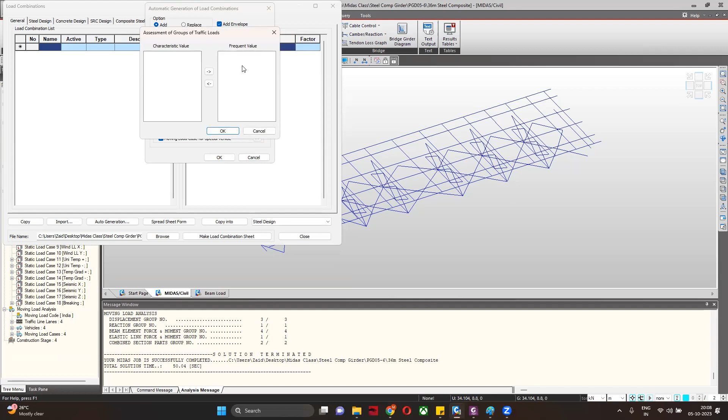Road traffic, not showing anything. Traffic load, I already considered it. Road traffic will be if any other loads you want to consider. Now, if you click OK, it will quickly generate everything. Now, if you look at this one, it has been mentioned here also, and here it has been mentioned, this is a description they are giving.

1.5, 1.35. This is characteristic, like stress, frequent, quasi-permanent, and above that are all our strength ones. This TR1 addition.

So now, when you look, if you want to do the steel design and composite design, nothing has been shown here. So what we need to do, we need to select all the load combinations, and we need to copy them into steel design and also into composite design. Now, if you go into steel design, it will show all the load combinations which we have created. And if you go into the composite design, it will also show all the load combinations. So that's how we need to consider those things.

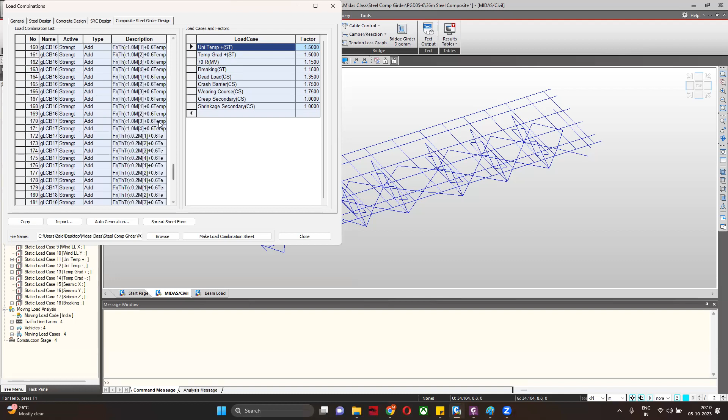So we can easily see what happens in this: it considers combinations as per our static load cases. If you go into the load, we have done it in static load, there are these static load cases. So it considers combinations by the type of load we have provided. We have provided wind, temperature, temperature gradient, or any earthquake or braking. So it automatically distributes. Midas already knows. This is smart. Midas knows according to the type which is required.

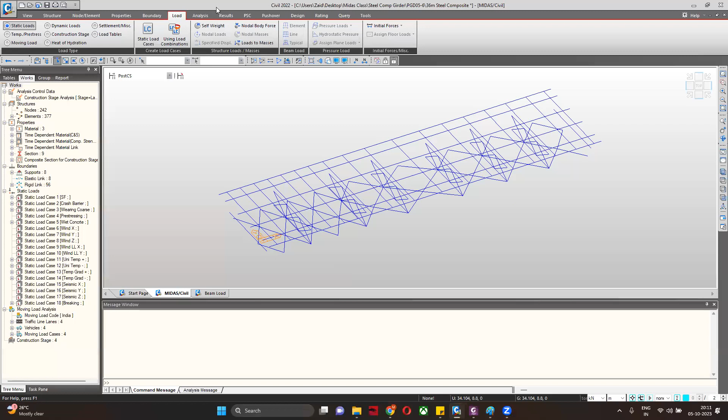Now another thing is that we know that we do not need to design bracing in steel composite, and we do not need to design steel composite with the steel girder. So both things are different. First of all, you need to understand that everything will behave differently. So that's how we consider it for the design part.

Design is pretty much, if you go into the design, we are not going into PSC. Previously, I have shown this kind of thing, PSC. Here we do not go because this is totally applicable for PSC girders, not for any other. So if you go into design, first of all steel design is here, then RC design, SRC, composite design, and here are the common parameters. First we need to do the steel design. Click on the steel design, and we need to select our code.

Now, if you look at the code, generally all codes are available. AASHTO 17, AISC, then Eurocode, BS 5950, IS 800 LSD, limit state design, and IS 800 1984 ASD, allowable stress design. Then IRC 24 2010, this is again LSD. Then this is CSA, the Canadian code.

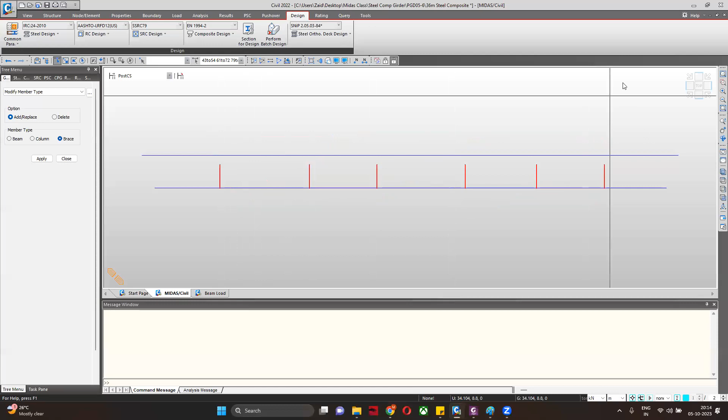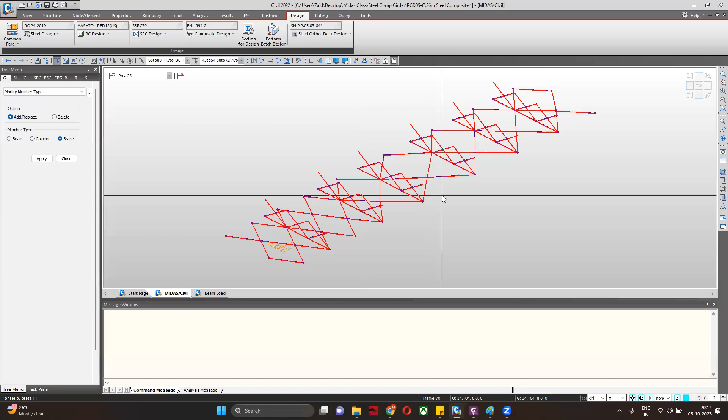Now here, if you look, we need to define which is bracing, which is beam, which is column. So here, this is our bracing, the X1. This, and even the bottom X. So let me first select this. That's how we are able to differentiate. Bottom one is already. Now you will select the bottom one also. But bottom one, you do not need to select this one. This will come into beam.

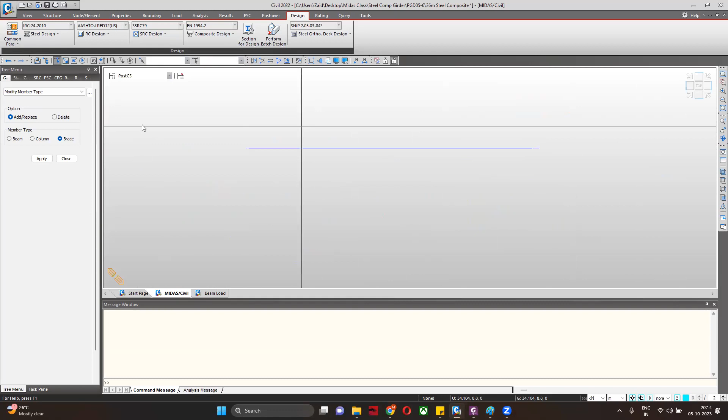Just deselect. And now, okay, this, select. I need to be careful when selecting. Or what I can do, I can select like this, and click on this thing. So this is going to be deselected. So these are all bracing. Click like this, not all the things are required, and click apply.

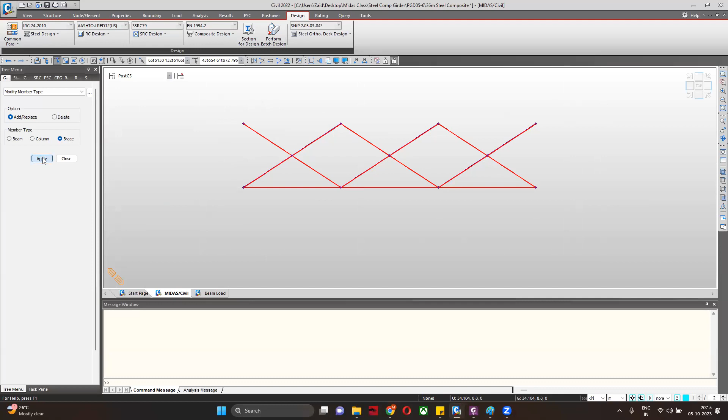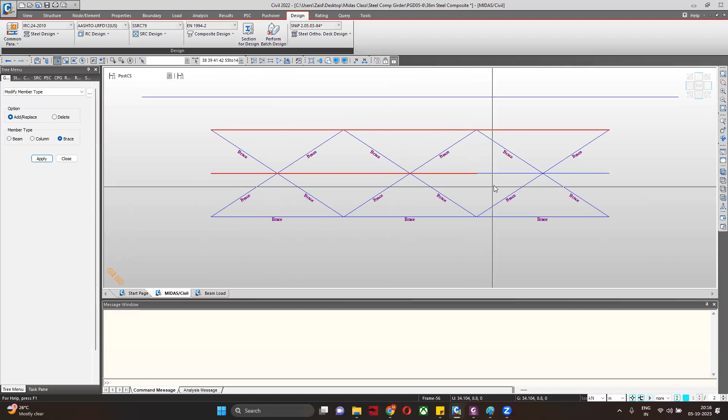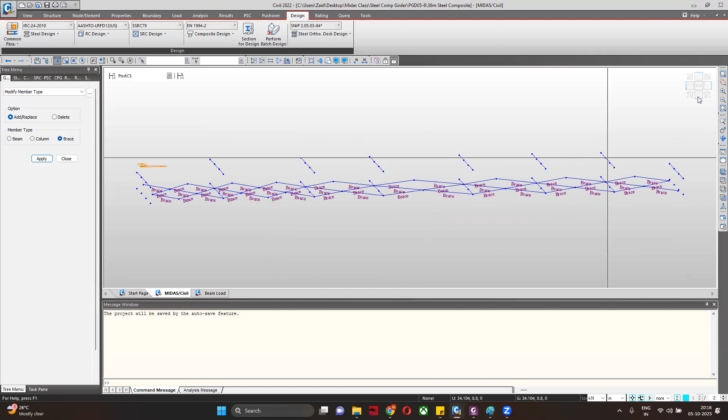Now it will consider this as a brace, and we will select our end diaphragm, our top bracing, not this one. Now we need to select the bottom one also, but for the bottom one we need to do a little bit. That means for this one, this one will come, this one, this one. This and this will come into your beam. Click apply. So this will become beam.

So there are two important things. Reverse member, local direction are not required, unbraced length right now not required, limiting slenderness ratio, not required. These are all not required. Now, if you have this common parameter, define it. So first of all, design code we have already considered.

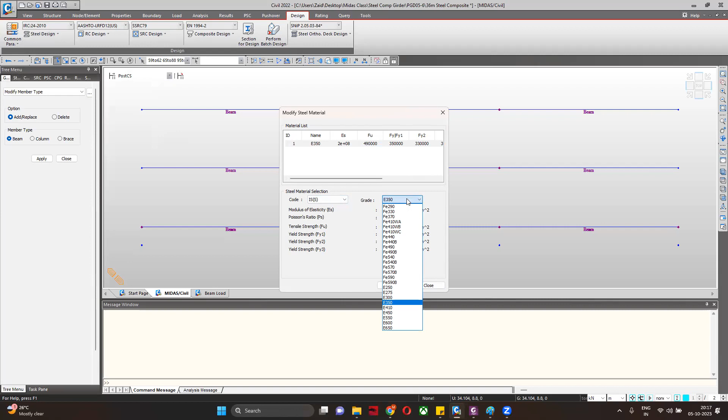Now steel material. If you look here, it will ask which material you are going to provide. We have already considered E350, for which our yield strength will be 350. But generally for bracing, sometimes low strength steel is used, so you can update to 250 for bracing. But right now I'm checking for this, so this is fine. Bending option not required, steel design table not required. Now you can click on steel design code, and it will run one command.

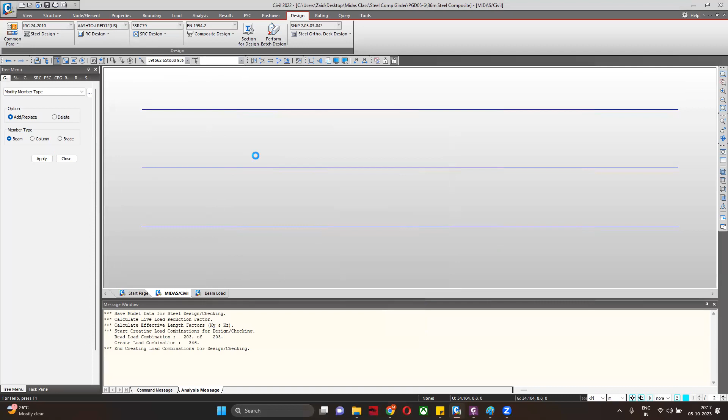So these beams are our girders, sir? No. Beams are your bracing which is connected transversely. Remember, we have not selected any girder members for assigning. Girder will be designed as composite. Yes. Now we are only considering the steel part first. Okay. Now we are designing the connected beams and the bracings. Yes, only end diaphragm and bracing. Will those also be E350 grade, sir? I have considered the same grade for all. It depends. You can consider a higher grade right now, but someone may ask that it be in a lower grade.

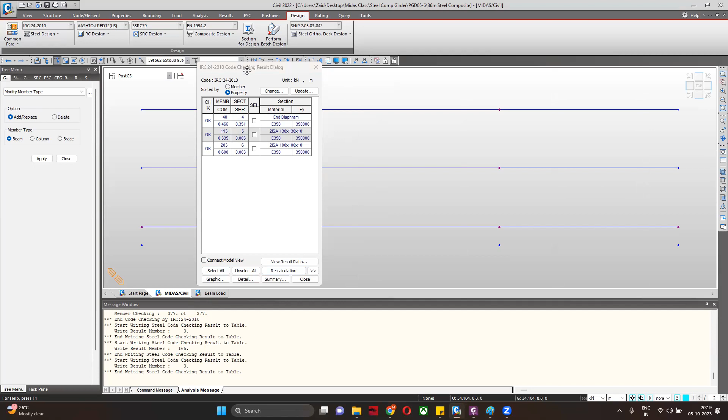Now, if you look here, it will give you this. It is checking right now as per properties. If I click as per member, we will have a lot of things. Now you can see the ratio it is giving: 0.4, 0.35, 0.35, 0.6, all are okay. And if I click on this, there is one more thing. What ratio is it giving, sir? I will show you. Wait a moment. First, what are all the parameters we need to check in steel design? Tell that, sir. Wait, I will show again.

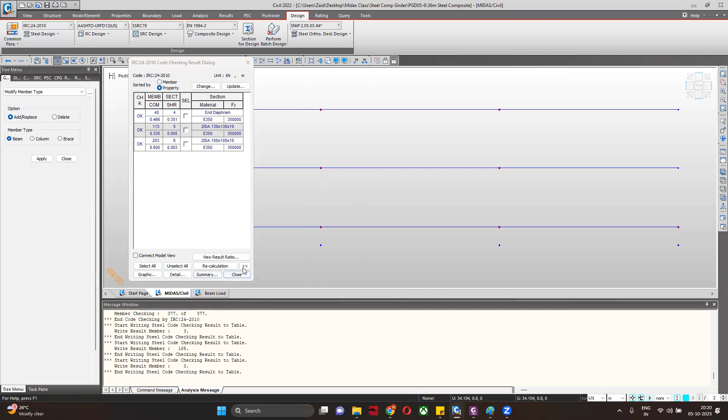Concrete, we know all the things: stress check, crack width. In steel it's different. In steel, the main ratio is the capacity as per the demand. You do not have a stress check. In steel, there is only axial force plus bending moment check. Or shear, sir? Shear is for the web, but generally shear does not govern much for bracing. Axial force governs. If you look here, N is my axial force, My is the moment in y direction, the major axis, and Mz is the moment in my minor axis.

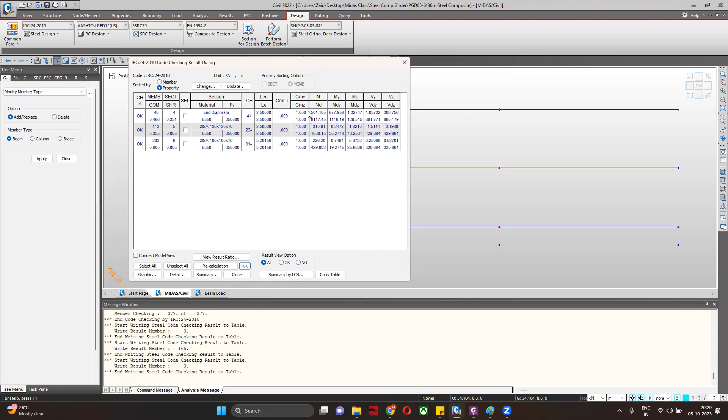Vy is your shear force in the minor axis, then Vz is the shear force in the major axis. So if you look here, these forces are given, and I want to show you the detail. I need to select a member like this one. There is one more thing, the table I am looking at. It shows graphic detail also, like this. So I have selected this right now.

So it is showing first of all the KL/r ratio. KL/r ratio is your slenderness ratio. So first it is checking that KL/r should be less than 180. It is less than 180, 90 is coming. Then another check for axial strength, then bending in both directions, then the combined check. The combined check is the most important, which is showing a ratio of 0.466.

Then afterward, it is checking the shear force. Shear force will be very minimal. Governing in steel is always the same: in bracing and all, it will be your axial force and bending. So if you look here, this is just the normal check. It does not have any detailed criteria.

Sir, slenderness should always be less than 180? Isn't there a difference for short and long columns? That is different. Column is different. Short column, long column limit is your 12. It should be less than 12. Slender is different. Slender relates to your web thickness and flange thicknesses.

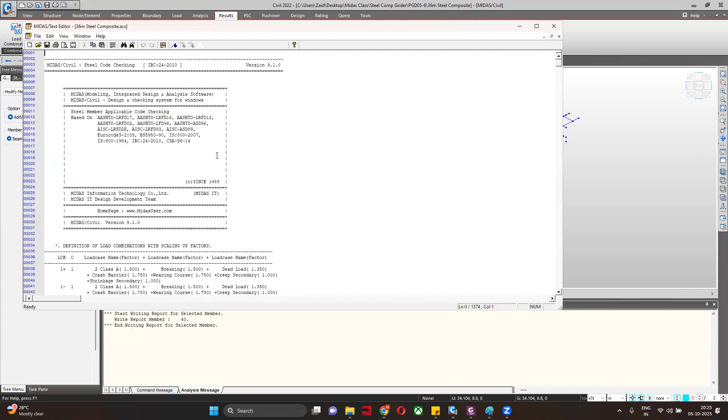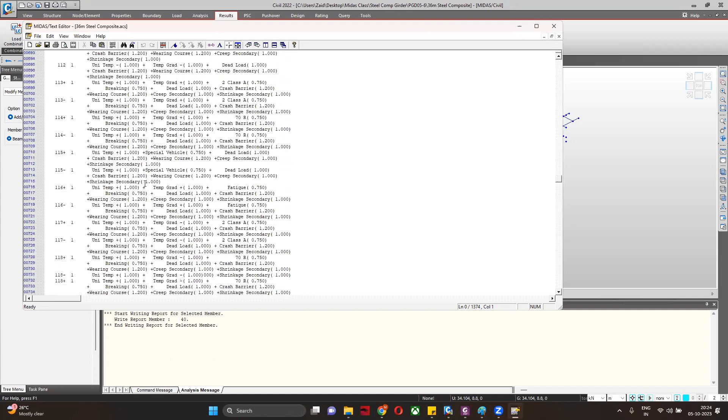Here, there is no bifurcation about plastic, compact, semi-compact. How will that be defined, sir? Let me check it. Now these are the forces that have been considered. This classification is only required for your beta factor, yes. But let me see whether it is considering those things or not. By forces, it is mentioning how much is coming.

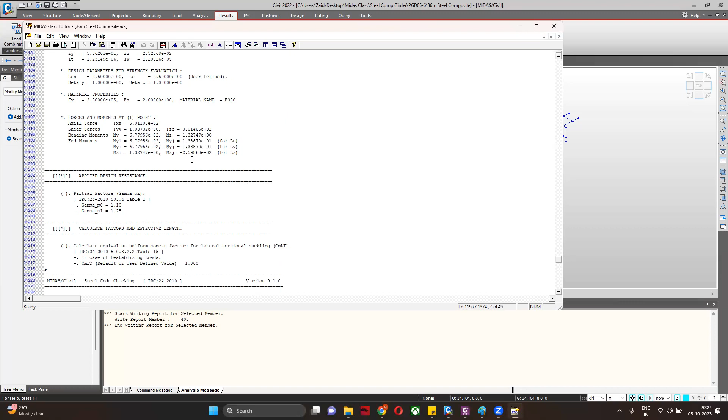You can see here the classification of my section. It is classified as semi-compact. That table is simply given in the code. I think I have shown you that. Let me open the code also. It's very simple. So it is checking the classification with the root of 250 upon fy. That's how we check it.

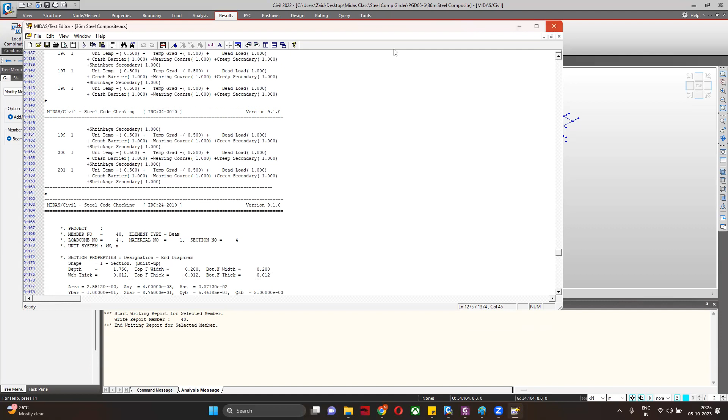Now go from the top, sir. This is the detailed design that MIDAS has given. From the top, the axial strength. At the top is the loading, nothing else. All these load combinations it will give you. Wait a moment, I will show you one more. There is one detail; you can get the detail according to this. Then there is a summary also.

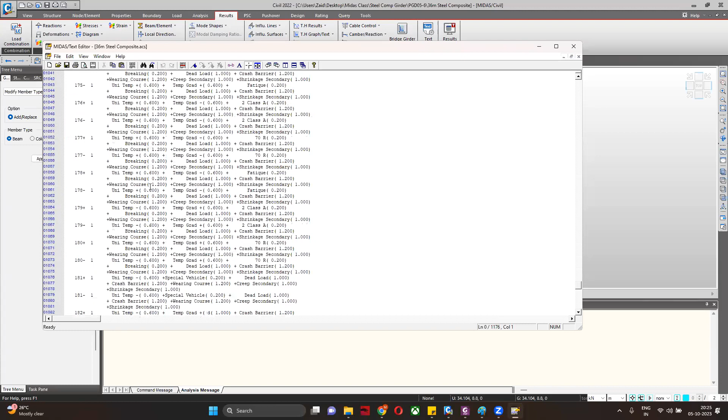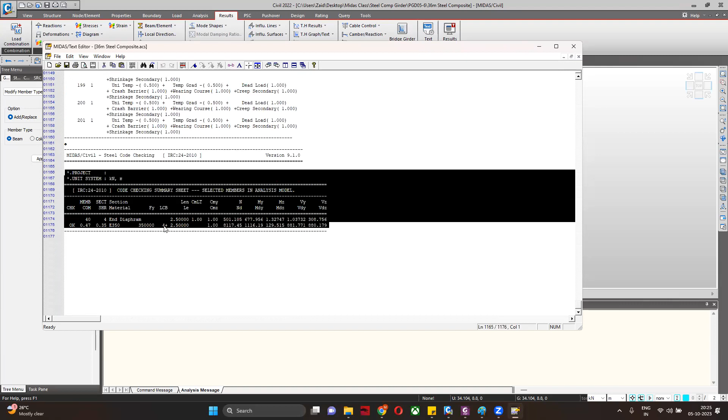In summary, we will also get the same thing. All the load combinations have been mentioned. If you want to attach the summary, generally if you see the design report, people always ask where is the summary. So the summary we put at the end page or the front page. So you can directly copy. And if you want to see everything in detail, then we have detail, then graphical.

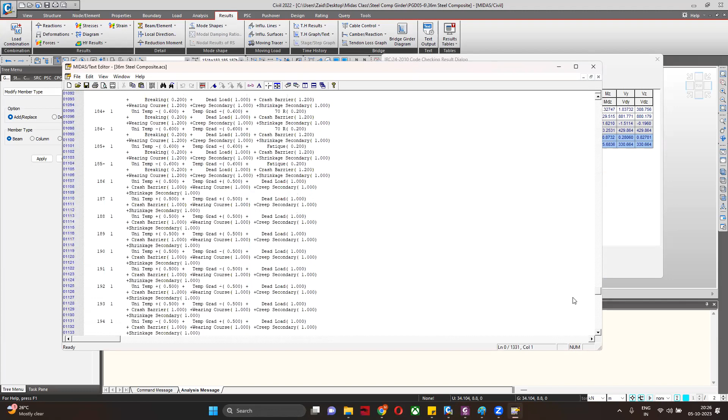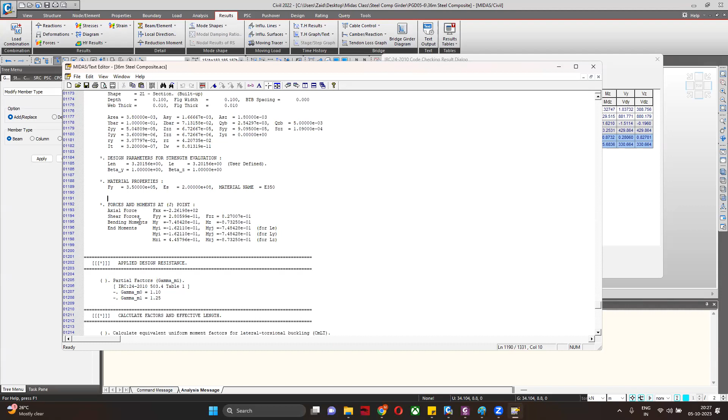Then area, then ASY, AZ, Y bar, like neutral axis Y, Z. Then section modulus, then RY, RZ, the radius of gyration, required for calculation of compact or not compact, or the slenderness ratio. And then design parameters, then material properties, then it is showing the forces: axial force, shear force, bending moment, everything.

Then partial safety factors. Again, these are the common ones. Then the code which is mentioned, and then equivalent uniform, nothing required. Classify section, it is classifying semi-compact class 3, then checking axial strength, then checking shear strength, then checking, I think, combined in local Z direction. Okay, yeah. Bending check.

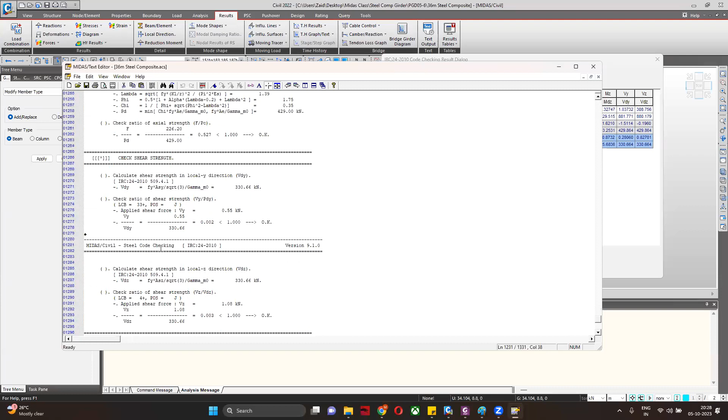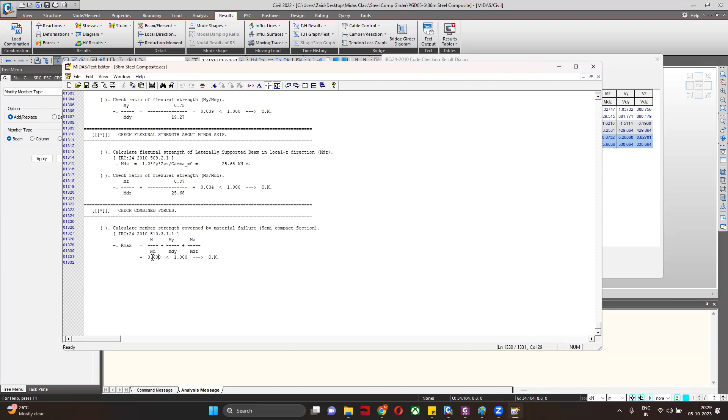Steel always depends on your combined check. In the combined check, remember axial force, bending in Y direction, bending in Z direction are considered, not shear force. The shear check will be different, and it will generally depend on the webs, but for the angle it will depend on which axis. So accordingly, this is the most critical section it is showing. Same for this one. If I click this, it will show me the detailed calculation. This is the graphical one.

So it has designed all the members which we selected, sir? Yes, it designs all the members. If you want to see all the members, how can I see? I am selecting property. If I change to member, you can see all the members. Now here all have been selected. But if you want to see any particular member, if you click here, this member is shown. You can go below and click, this member is shown. You can get whichever member you want.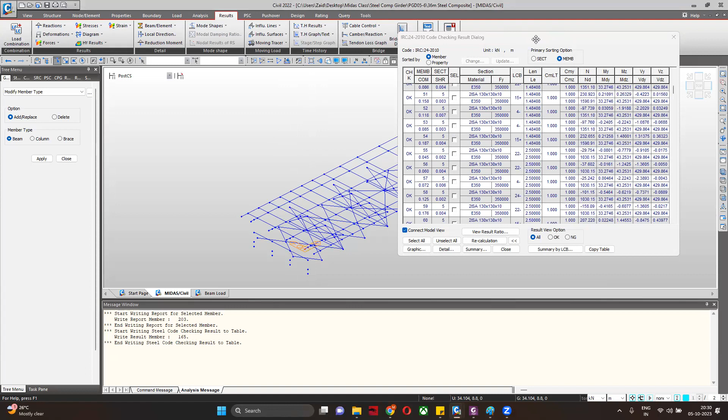Now, if you want to see which is critical, go to the property. This is the critical one it is showing. You can click here, you can see the detail, graphic. The graphic was not able to come in, I do not know why it has been hiding. And this is the design table, if you want. And we can copy this summary, detail, graphic. And this is also showing the ratio here.

One more thing, let me close that. If I go into design, there is one more thing: steel optimal design. If I click this, it will try to automatically optimize it. Maybe I will try. So now you can see here, it's saying about the end diaphragm, that in the end diaphragm we are able to do something. I do not know what was previously there. Maybe I need to see it.

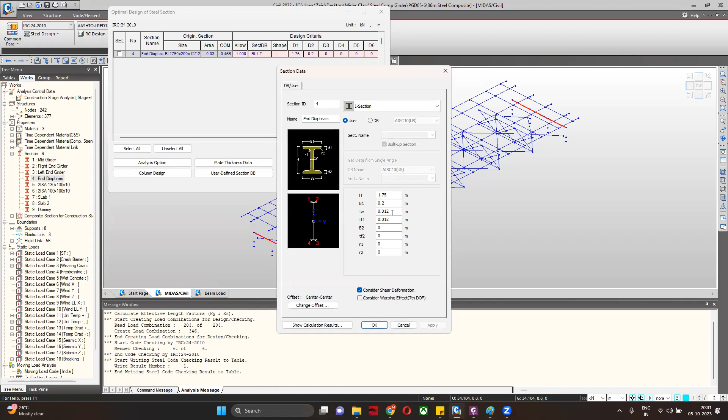So 1.75, built up now, and it's changing the end diaphragm, but 12 mm to... What? Let me click this. Design and analyze.

Sir, this optimization, can we do it for all members, or will it show which ones we can optimize? No, only some; it will automatically give us. So it is saying it is still doing it. Only steel members, not the composite ones. No, no, steel members only. Whichever can be optimized, only that it will show. Not for all, only which can be optimized.

Midas already has some inbuilt algorithms. I do not know the accurate one, but some algorithms are there that tell this member can be optimized, so it will automatically tell us that you can optimize this one. Now, if you look here, it is checking and doing something internally. Generally we do not do that, but I'm showing this option. Generally, if we are changing something, we do it according to our own drawings and application. Now it is reanalyzing.

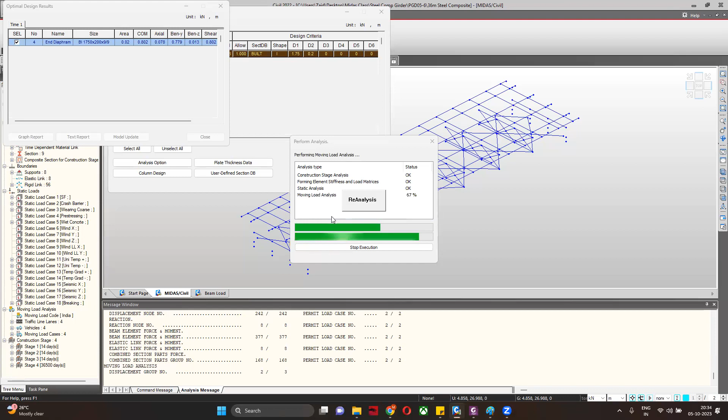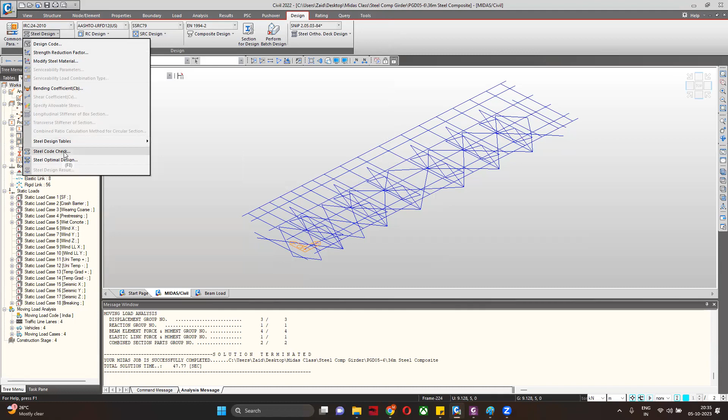I've shown you individually, na. Let me again. Then I need to run it again. No, that is okay. For example, if it is greater than 1, we need to see now where it is failing. We can check in the details. That is what I told you, that I need to run it again.

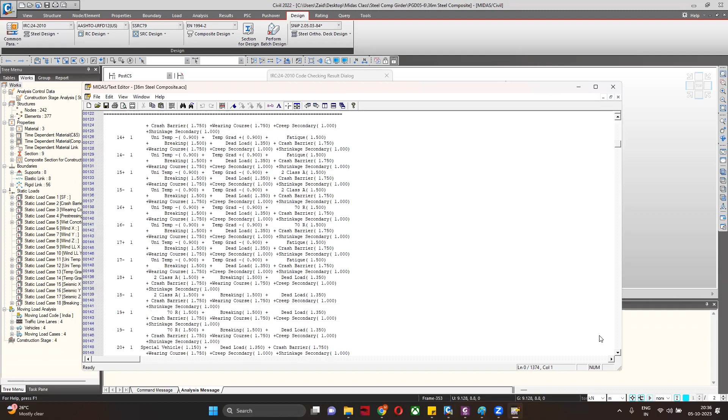Now if you look here, I think it has done some optimization. We need to see what it has done. If you click on this and click on the detail, you can clearly see. First of all, your section is always going to fail in this combined check, combined forces. Right now it is 0.466. So we need to see the individual checks, like flexure strength is 0.6, minor axis is 0.010 if you look here, and my axial strength.

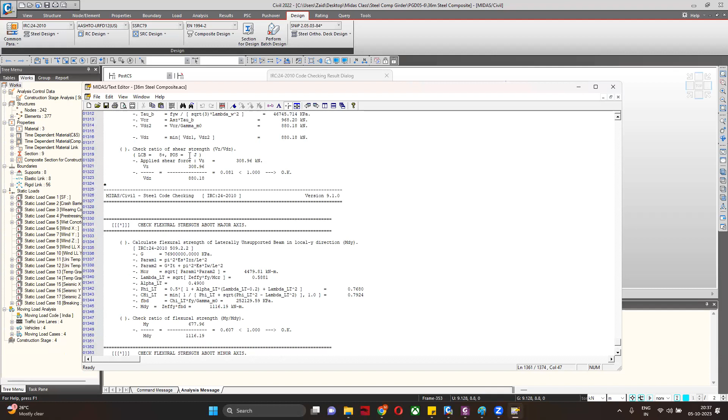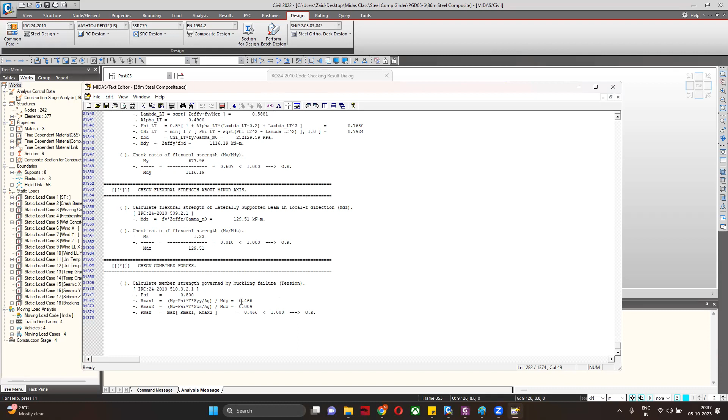Check for shear: shear is not required in the combined check. There will be axial at the top. Yes, it is 0.062. Like the combined check, the bidirectional moment check in columns. Have you seen it as per SP16? Yes, sir. So that is the thing here. So it is showing like this, so that will be fine. So this is the combined ratio.

In this member, which is the major and minor axis, sir? Major and minor axis we can see in the graphic one. You can see this one. Can you zoom, sir? Along the Y will be the major one, and along the Z will be the minor one. There is no zoom option. Can you see now or not? Here you can see this. Yes, sir. So this is the section. Y1 is the major one, and Z1 is your minor one.

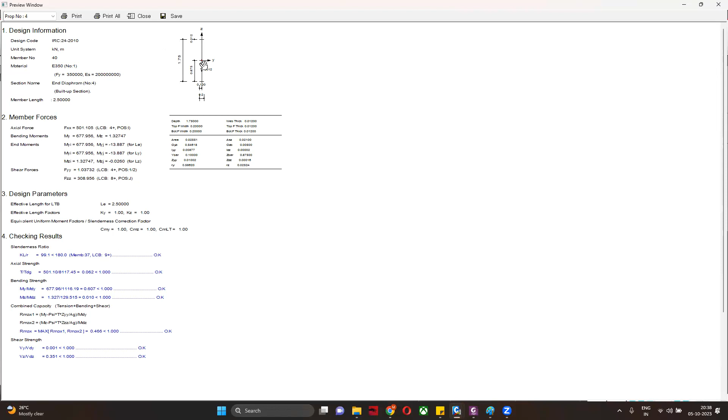Means our thickness web, that's our section where it is. Along the web it generally comes, not always, but if you rotate the section, then major and minor will change. So you need to see how you have made your model or how you have provided it. So the major one is Y right now. If your governing moment is MY, that will be our major one, because we need to check in MY. If you remember, MY moment will be there. So in local axis, Y will be major and minor will be perpendicular to the major one. That is this Z1.

And this normal small table is also there. If someone asks you to give a small thing, you can give just this result. That is also okay. Which option, sir? Here three options are the graphical, detail, and summary. Summary will give you only summary things like this. Which one, sir? The graphical. This one. Okay. Then you have detail, summary. All things are here.

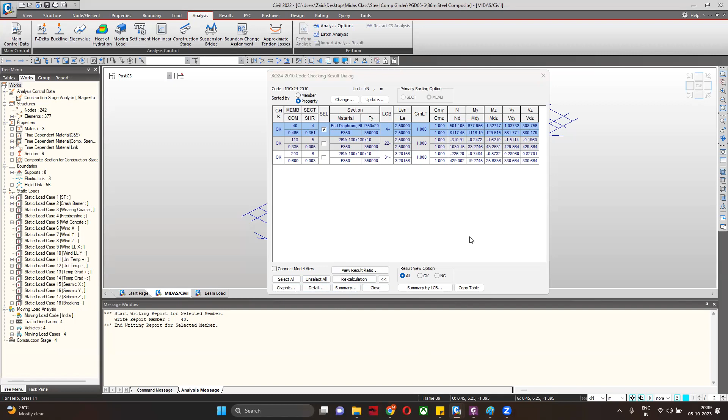So let me close this. This is for steel design. If you want to design any kind of steel, if you want to design a building, if you want to design any industrial member, you can design anything with Midas very finely, no issues.

Sir, this recalculation option, when will you use it? Where is the recalculation? Here. With this, if you change any member size or anything, it will recalculate it. It is just for this thing, nothing else. If I click it, no selected members. So for the selected member, it will try to recalculate it. You can see rechecking the member. If we change anything in the model, then we can recalculate it.

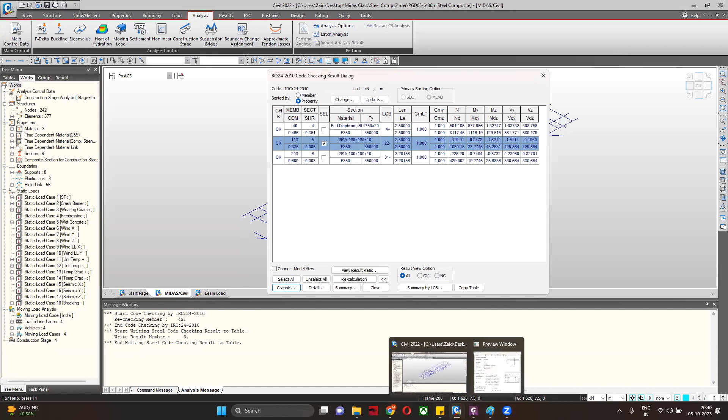Now, if you see this graphical, generally it is there, but I don't know why it is hiding. If you look now, this is my angle section. If you remember, that's how we have modeled it. So this y-axis is my major axis, and z1 is the minor one, because that's how we modeled it. If we change the modeling direction, then the direction here will change. It totally depends on how we are modeling, because the software will consider the local axis of modeling. It will not ask you to input your axis. Whatever you have modeled, it will assume that you have modeled correctly.

So remember one thing: if you are doing the design, your modeling should be very accurate. If you have axis changes in the modeling, then your result will be different, because the minor axis becomes the major axis and the major axis becomes the minor axis. For that, everything will fail. So that becomes critical.

We have rotated one angle section by 90 degrees, no, sir? These are the rotated ones. Yes. So this is the correct way, because actually at the site, with the girder, this is how they are going to be constructed. This is the correct axis order. That's why I changed it, if you remember. At the time of applying it, it was giving a different direction. Now that becomes effective at the time of design. That's why I'm mentioning that whatever I'm doing will affect our design.

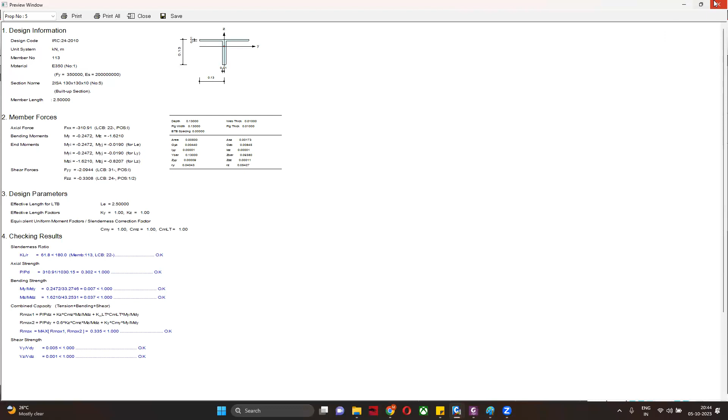Yes, sir. Sir, the table you are trying to show? Table. Capacity, not classification of section. In code, IRC 24, 2010. This is section V. Section classification is nothing but just initial consideration. Generally, it does not have that much effect.

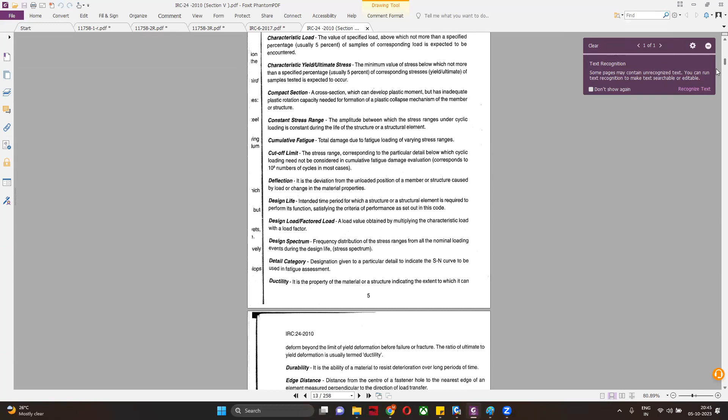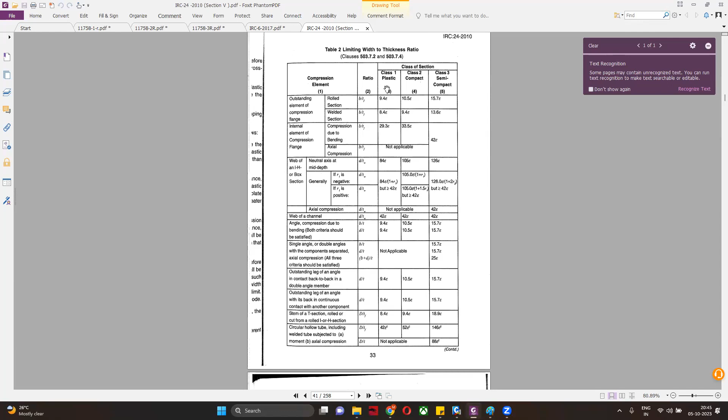If you have compact, semi-compact, or... Which should not be there, sir? Which is good, which is not good, which should come, which should not. The best is the plastic one, then afterward compact, but plastic one will give you a more conservative result. Then compact will give you again conservative. Semi-compact will give you an economical result.

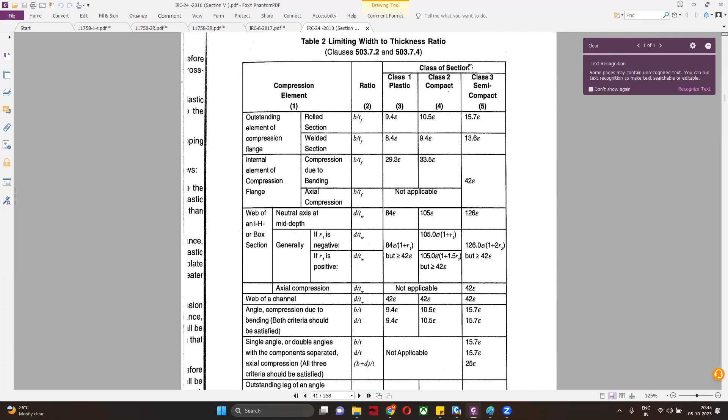Here the slender option is not there as per IRC 24. But if you check IS 800, it is directly copied from IS 800. Nothing has been changed, and that is the main benefit in steel design. If anyone has worked in IS 800, they can work with the steel. Okay, same, sir. Yes. Let me show you. Formulas, everything is same.

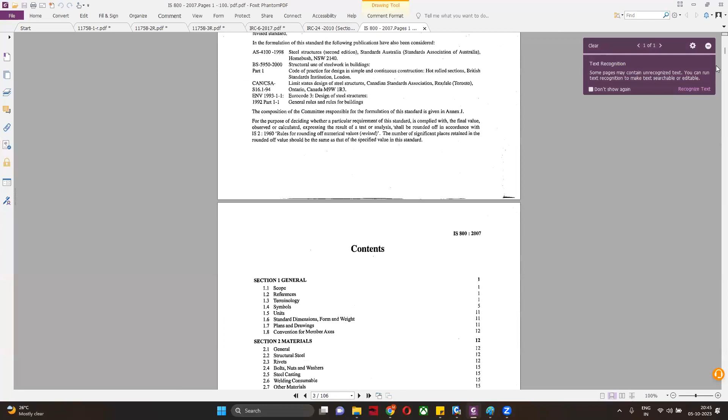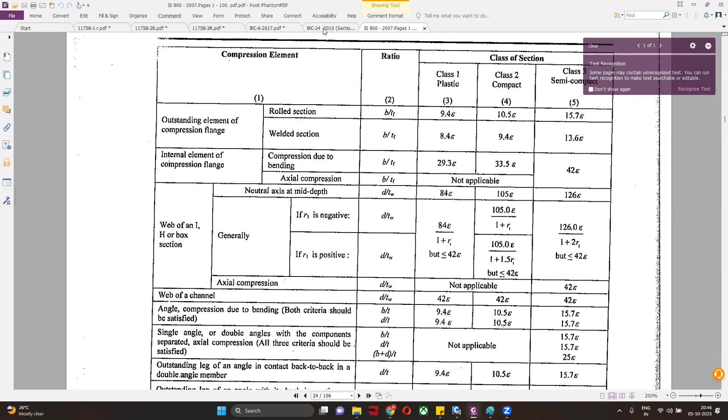Only change will happen because of the composite one, because IS 800 does not define any composite thing. That is IRC 22. Now, if you look at here, this is as per IS 800. IS 800 also does not provide for the slender one; maybe they will include it in the latest one. So you can say 9.4ε, 10.5ε, 15.7. Everything directly copied from IS 800 to IRC 24. So that is good for steel design. Everything is directly copied.

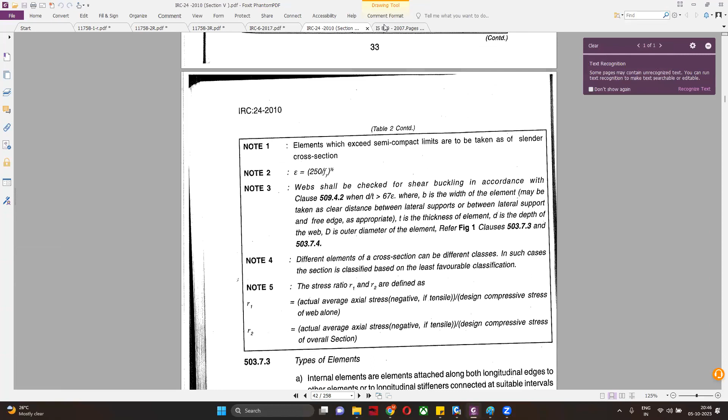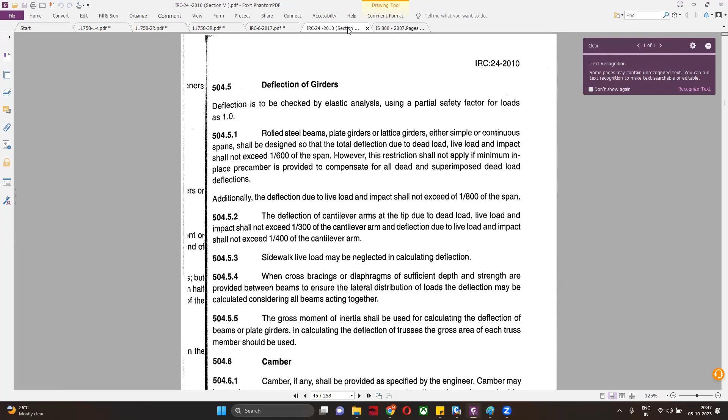Even this moment capacity, if you look at here, everything is copied like this. So I will close that. Only some extra things will come. Let us close this. So we will discuss now the composite one. For composite, again, we are in the results design tab. We have explored this thing. Now for composite, it is mentioned here.

First of all, we need to select our code. If you look here, different codes are available, like AASHTO, Euro, CSA, SNiP, SP35, IRC 22 2008 and IRC 22 2015. So we use IRC 22 2015. If you want to see the design parameters, these come directly from the code itself, like stress limitation, 1.5 for concrete basic combination and accidental 1.25, and what checks you want, like post buckling tension field action.

If anyone has read design of steel structures in college, there are two methods available. One is the simple post critical method and another is the tension field method. If we consider the simple post critical method, we can design it without stiffeners. If you want to provide for the connection, that is up to you. But for the tension field method, we need to consider stiffener spacing. So selecting post buckling tension field action means some stiffener will be there.

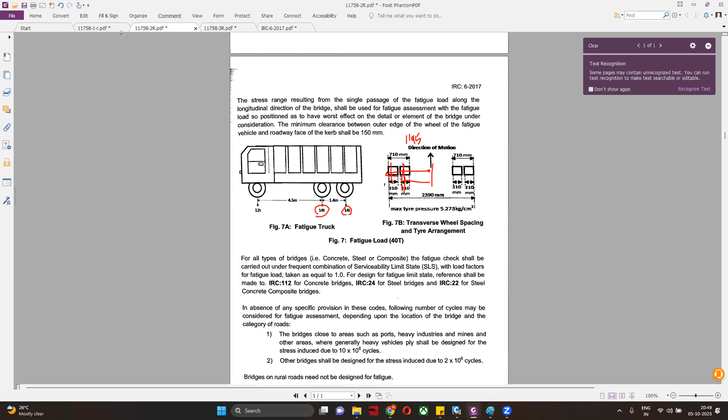Now it will ask you the checks: bending resistance, resistance to vertical shear, lateral torsional buckling, transverse force, longitudinal shear, fatigue, then serviceability, stress limitation, longitudinal shear again, deflection and crack. Crack only for your concrete. These are fine. Let us close that. Then design material. We need to provide reinforcement. IRC should be here. Grade will be 40. Concrete grade, reinforcement again.

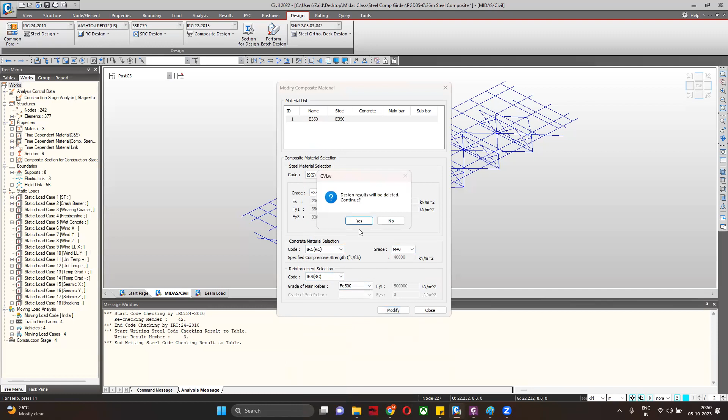Fe500 modified. Design will go, but one more thing I forgot. One more, 1, 2, 3 important things are there. Properties, section manager, reinforcement. Here, if you remember, we provided this reinforcement for the other girder also by this input method.

First of all, create grid line. 0.03. Then again, starting point, I will use CTC 200 mm H bar. Okay, it is showing me this as per ACI, this 4 will behave as a 12. And now it will ask me part 1, part 2, so it will be in part 2.

Not IRC, sir. This is IRC, but units have been considered like metric units. So these two, it's fine. Do not require any shear reinforcement, just apply it, because we are not checking any web. Steel web is there.

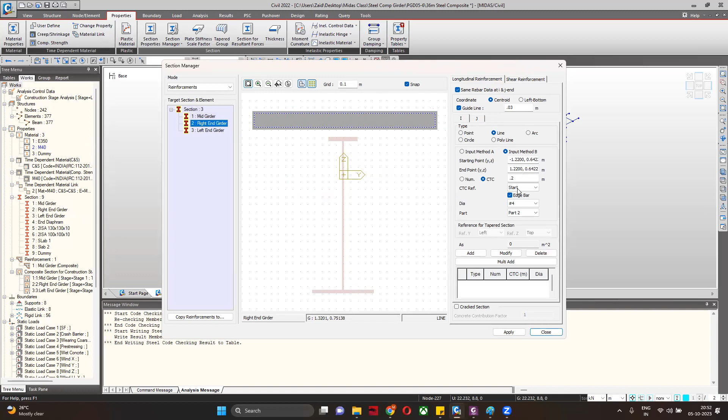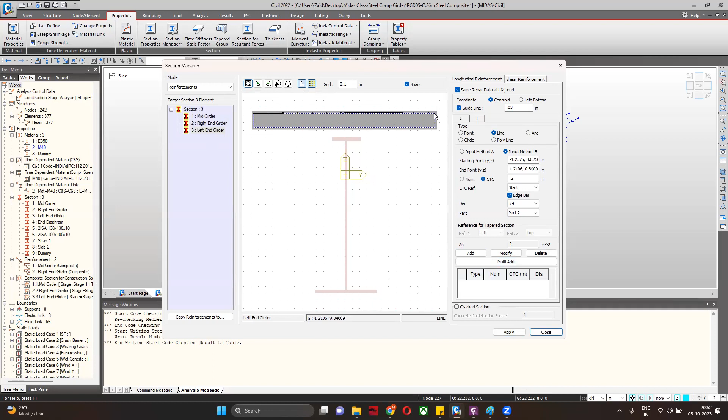Then again for this one. So we need to draw something, sir? That will be, yeah, right. Drawing it? Yeah, it has already come. Now I want to apply for this thing. Just providing for all the girders.

Now one more important thing will be here, effective width. So we need to go in structure. There will be steel composite. Now we will give span information. So here, span information like girder name. First of all, we will check. Where was it, sir? This one, this tab, in structure.

You will have PSC for span information and section reinforcement also. Then in composite bridge, you will have span information and effective widths. So first of all, we need to give span information because according to the span, it will calculate my effective width. Now it will ask you what is my mid girder or what is my extreme girder. Generally everyone knows, mid girders and end girders.

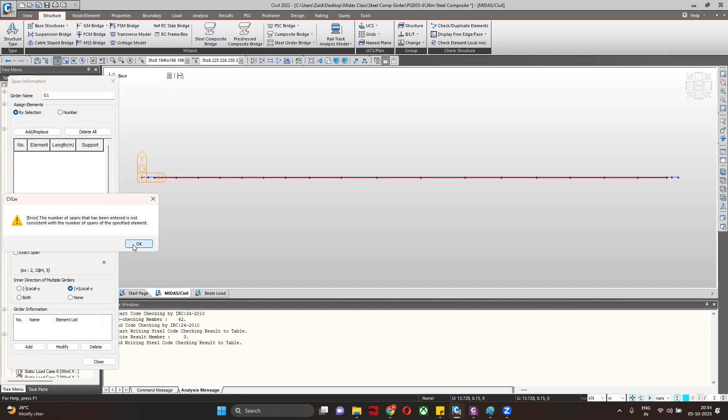So here I will differentiate, like I'll mention G1. So for G1, I need to select those elements. Maybe I will select this one. Click on this. So my girder is from this to this. And this is the starting point. The number of spans entered is not consistent with the number of span specified elements. Where have I mentioned span? I have not mentioned anything. I have mentioned girder name, add and replace. Yes, you can see like this.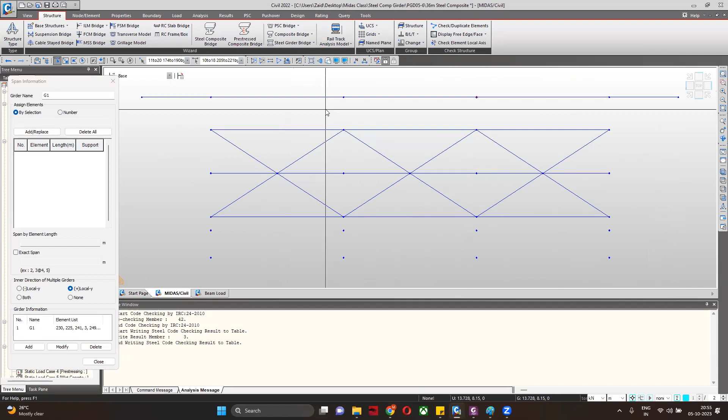Now we need to provide what is I point and what is J point. So 230 is my I point and 303 is my J point. So I click add for this one. I will also create one more for the middle one. This, and click OK. Now this also, like G2 I will mention it. And for this again I will select, but here I will select both. Both direction girder is available. First of all, add.

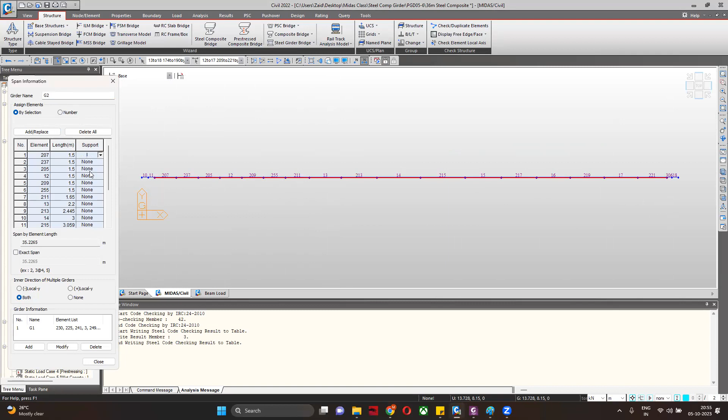Let me see, it is coming to I point. What is this, sir? Local Y, that axis, how to select, sir? Yes, let me look at it. This local Y is like the starting and end points. Generally Y starts from this point, this is the axis, Y goes in this direction. So this is my starting point, so starting will come with positive Y. And whatever the end girder is, that is negative Y. And whatever girder is in between, it will always be considered as both. So let me close this.

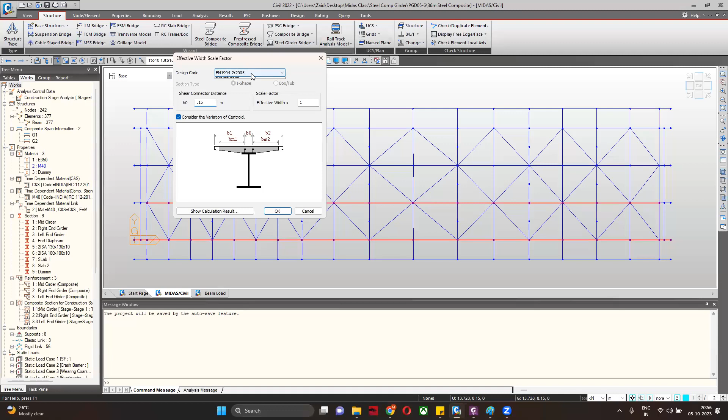And now we will go into effective width. Now if you look here, it will ask you this. It is saving. So scale factor will be 1. B0, shear connector distance, it is asking. So we can consider 0.15. And code will be as per IRC 22. You can click OK. But it has opened the syntax editor, I don't know.

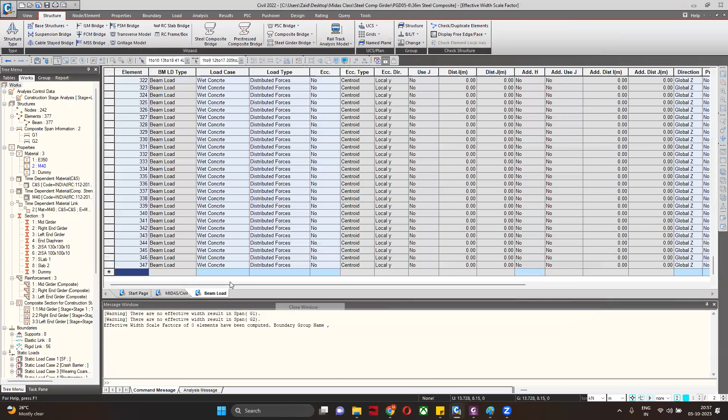There is one more thing there. Here, effective width means what is it calculating, sir? I've shown you this thing. My effective width will be BM1 plus BM2, not the full width generally. But it depends; sometimes it comes directly as the full width. So it depends totally on the span information and the available width. I want to see the result. Where have we entered this value, sir? Nothing you need to enter. Just here. Consider the variation of centroid. Fine.

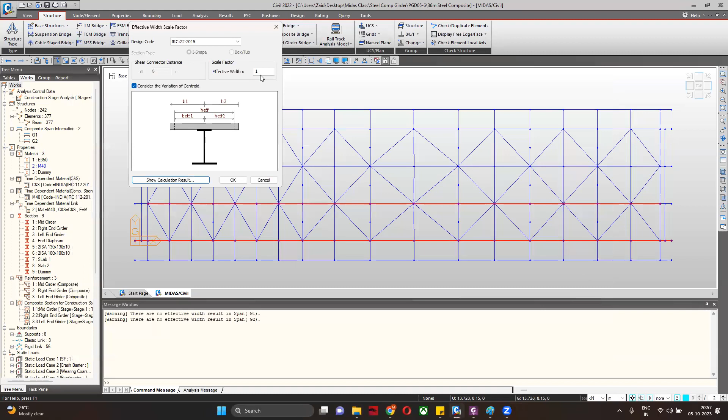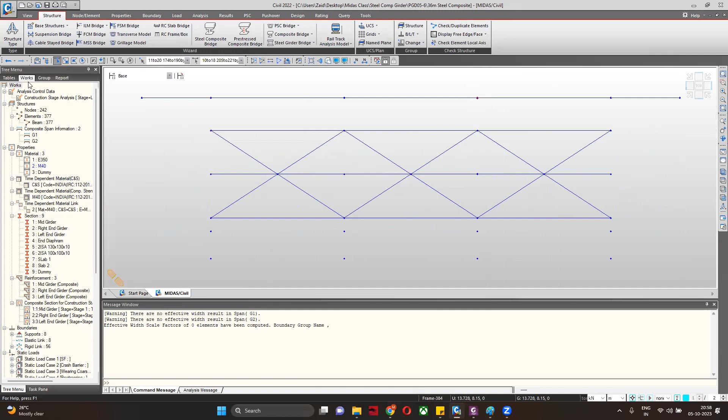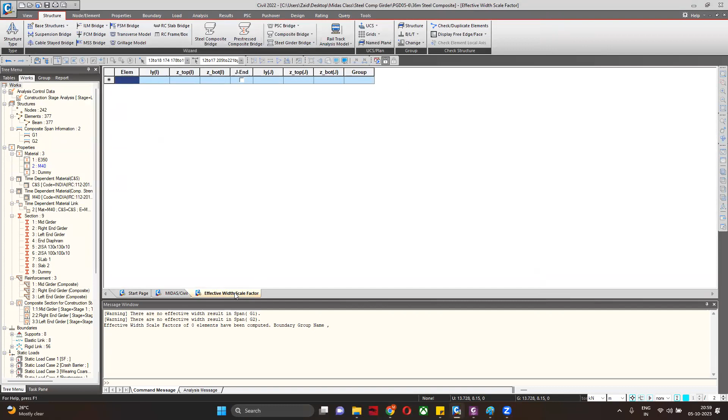You can see here, B effective, B1 is there, B2 is there. So that is the thing, but why it is not being considered? Like if I select to member, always taking in there. Okay, close that. I will let you know this thing. The span information we have already given. Now we need to again run it. That effective width, maybe it is not showing. Maybe it is applied. I don't know why they are taking the strut thing.

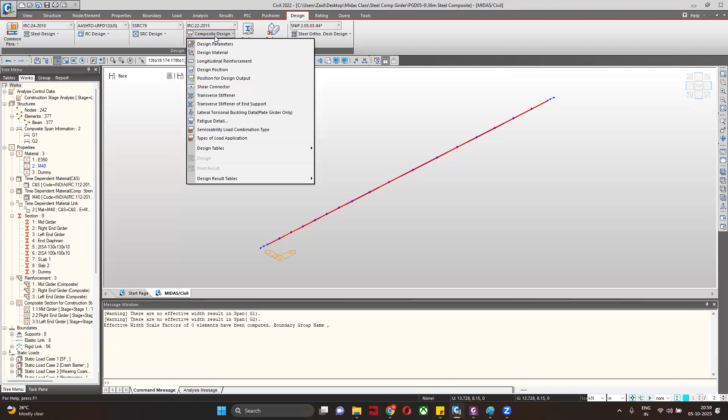That is a different thing. So now another thing, if you remember, longitudinal reinforcement we have provided. Now it is asking design position, position for design output, the same thing. And shear connector, transverse stiffeners, there. Transverse stiffener, lateral torsional buckling, plate girder only. Fatigue details, serviceability, load combination type.

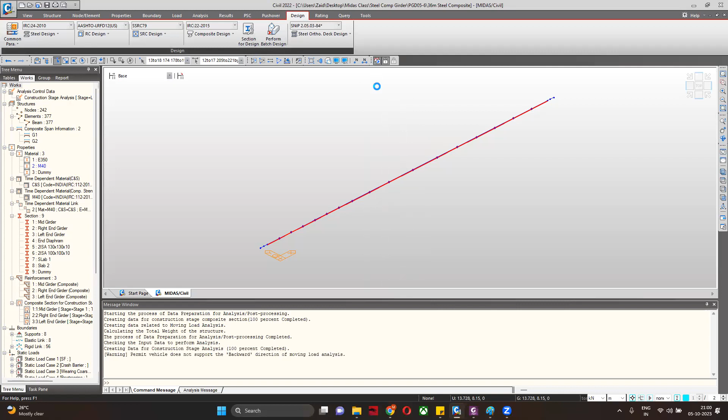Now it is not coming here anything. Why it is not coming here? If I go, yes, because I have not mentioned it. Again, first let me run it. Okay. We have to give that, no, sir? Rare, frequent, that serviceability combination type. Sir.

Hello. Hello. Everyone seeing my screen now? Hello.

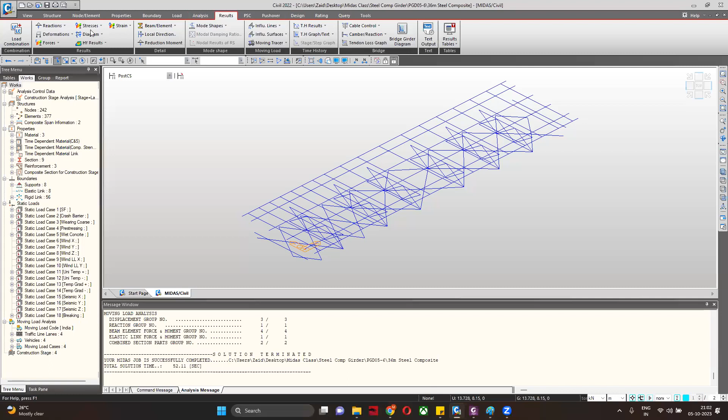No, in this column, sir, active strength serviceability. That one. Okay. You are checking some other column. I am checking in the add one. Right. So this will be changed into my serviceability. So let me try if I can copy this. Which will be changed? This from characteristic. Maybe I will look at the spreadsheet form. So it is changing from this.

From 76 like that, how you got to know, sir? Not 76. You should remember from where the characteristic starts. If I have other loads added, it will change automatically. It's up to you. Not 76 or any other thing. No, sir. Up to which combination is strength, from where serviceability starts, those factors we have to know, or something, no, sir?